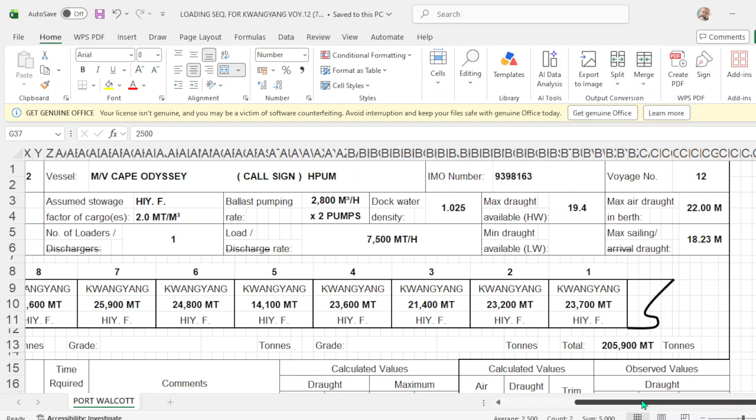This is an actual loading plan or loading sequence from the vessel Cape Odyssey. This is my recent vessel. This is a capesize vessel, and the actual loading of this vessel was on April 4, 2012 at Port Walcott, Australia, and the cargo is iron ore to be discharged in Kwangyang, South Korea. The total cargo to load is 205,900 metric tons, and the dock water at the loading port is seawater of 1.025.

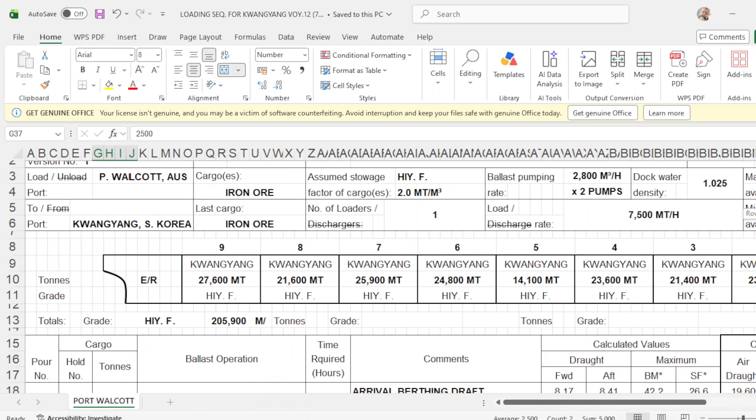So you have here the load rate, and we have the number of loaders, one loader, and this is now the sequence. As I previously explained, this is the pour, this is the cargo hold, and this is the amount of cargo to be loaded in each hold. This is the ballast operation, and this is the draft: arrival, berth draft. You have the forward, aft, bending moment, shearing force, the aft draft, the mid draft, and the trim. So the pour goes until number 20.

And the cargo hold starts with the odd numbers 3, 5, 7, 1, 9. Then you have 7, 3, 5. So these are the amounts of cargo to be loaded in each cargo hold, the ballast operation, and so forth.

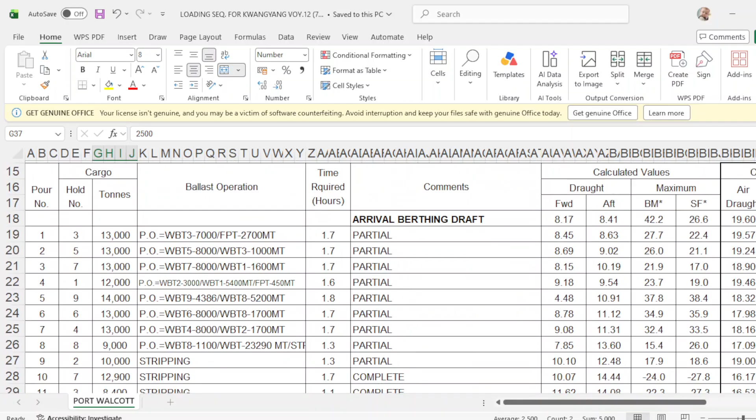Now, let's say for example that the loading operation is already in progress, and the chief officer has written in his night order book that upon reaching pour number 18 and upon completion of loading in hold number 4 of 10,600, the duty officer will advise the foreman that it's time to stop the operation, or the foreman will advise the duty officer that he will stop the operation, so that the chief officer and the draft surveyor will make a draft reading around the vessel, forward, aft and mid, port and starboard, to compute the remaining cargo to load for trimming.

But according to the plan, the trimming holds are hold 8 and 2, and the remaining cargo to load in hold number 8 is 2,500, and hold number 2 is 2,500, with a total of 5,000. Assuming that the chief officer and draft surveyor have completed the draft reading and they both agree on their readings, the reading forward is 17.77, and the reading aft is 17.96. The mid draft they both agree is 17.87, and the trim is 0.19.

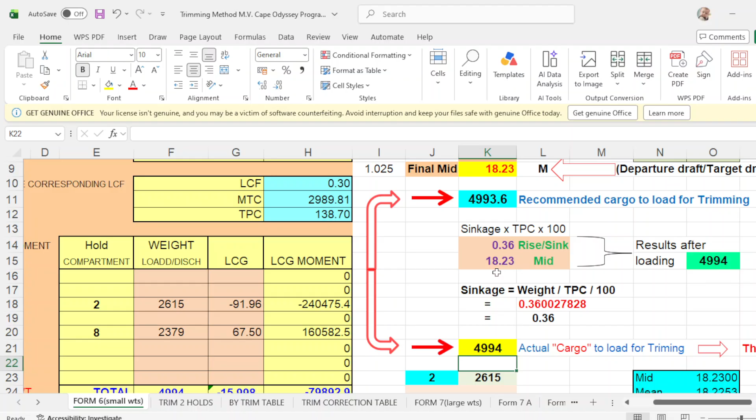So once you put 4994, the results after loading this amount, your departure draft will be 18.23, which is the same with your loading plan. And your sinkage is 36, which is the same here.

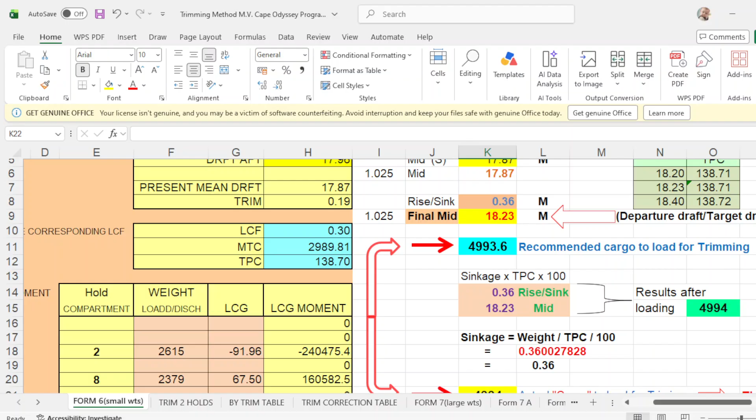And there's another formula of getting the sinkage: weight over TPC over 100. So your weight is 4994 divided with your TPC of 138.71, then divide by 100, you will get the sinkage of 0.36. So this is first sinkage, second sinkage, and the third sinkage will be this one.

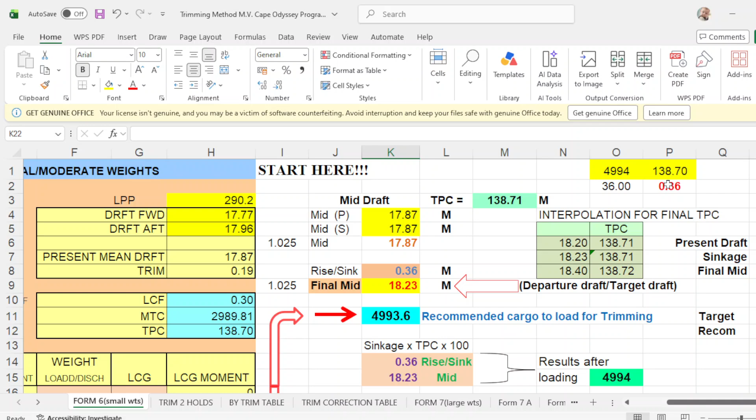Since you know already your weight of 4994, you put here 4994, and at the next column you put your initial TPC from your initial draft of 138.70, which is this one. So your weight of 4994 divided by 138.7, divided by 100, that will be 36. Okay, that will be your sinkage.

So your present draft is 17.87, your mid draft or your departure draft, plus your sinkage of 36, then your final mid departure will be 18.23. Okay, your target for trimming or amount of trimming is 4994, and the recommended is 4993.6, so difference of 0.4. Okay, so follow this arrow.

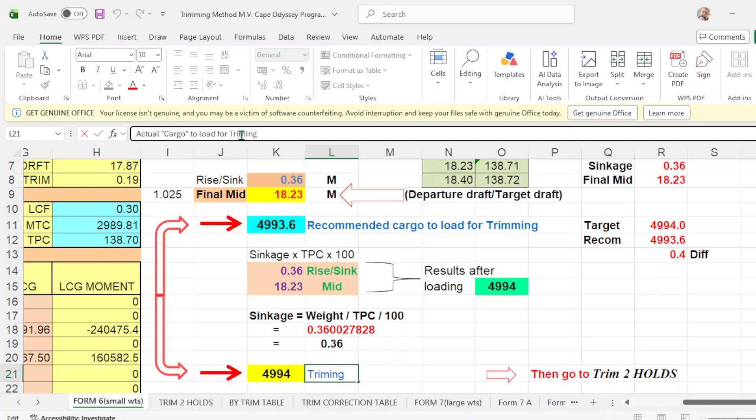Actual cargo to load for trimming, put this M, another M, I will save it. Then go to Trim 2 Holds. This is your trimming with 2 holds. Take note of the remaining cargo to load for trimming: 4994, the initial draft, mid draft, and your trim, the MTC, LCF, and TPC.

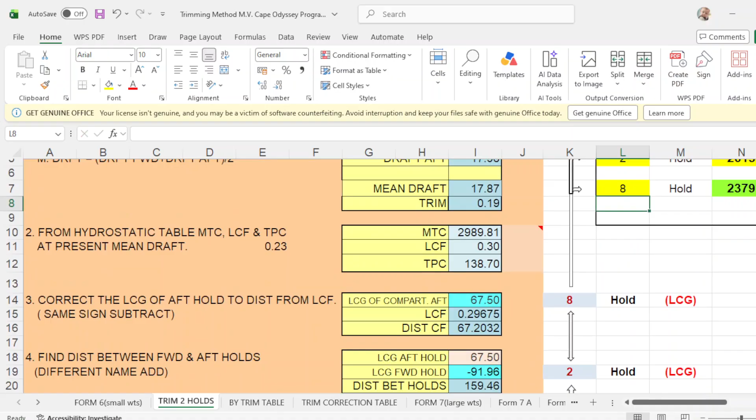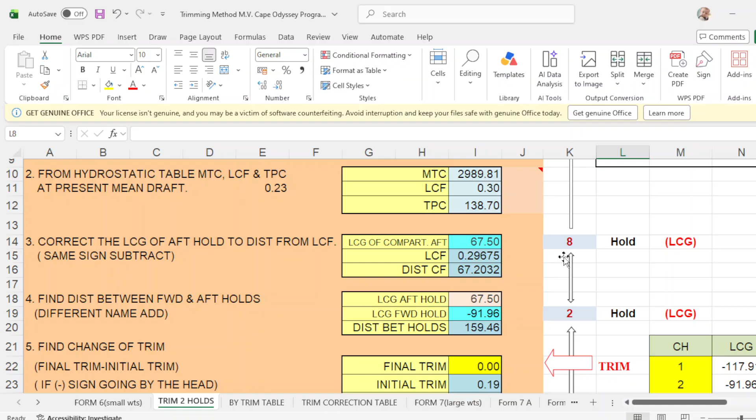Take note of your trimming hold. How much is your trimming hold? Trimming hold is 2 and 8. Go back to the program. So you put here 2, hold number 2, and number 8. Then scroll down. Take note, guys, when you press this number 2 and 8, it will automatically register this one, 2 and 8, and here 2 and 8.

For example, if your trimming hold is 1, put here 1, and the other one is 9, and they will change the trimming hold to 9 and 1, and the amount to be loaded is 9 and 1. So let's go back to the original, which is 2. Press 2, then press 8, and go back to hold 8 and hold 2.

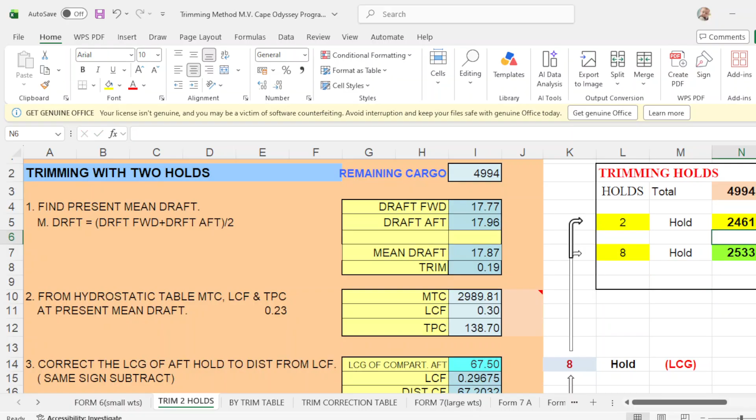Now we have no trim because according to our plan, it is even keel of 18.23 and 0 trim. So our trim would be 0. So you put 0. And it will recommend how much to load in hold number 2 and number 8. So in number 2, the program would recommend 2461. So we put here 2461. And number 8 will be 2533.

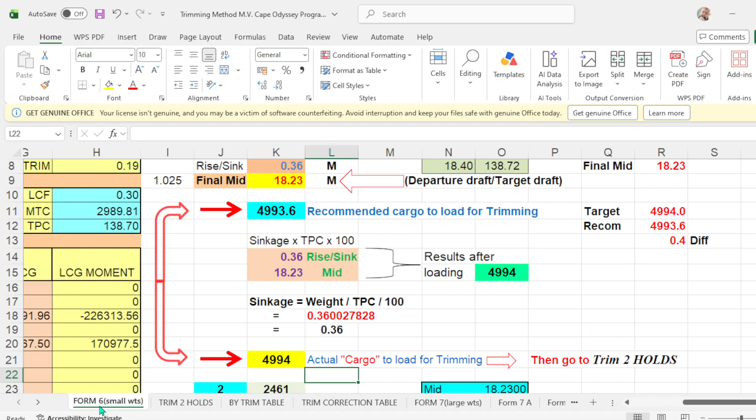Then you go back to form number 6. Take note of this amount of cargo to be loaded in 2 and 8: 2461 and 2533. So you go back to form 6, scroll down. Now, in hold number 2, you will load 2461, and number 8 was 2533. So you put here hold number 2 and 8, put the weight 2461 and 2533 number 8, and apply the LCG. Okay? Double check.

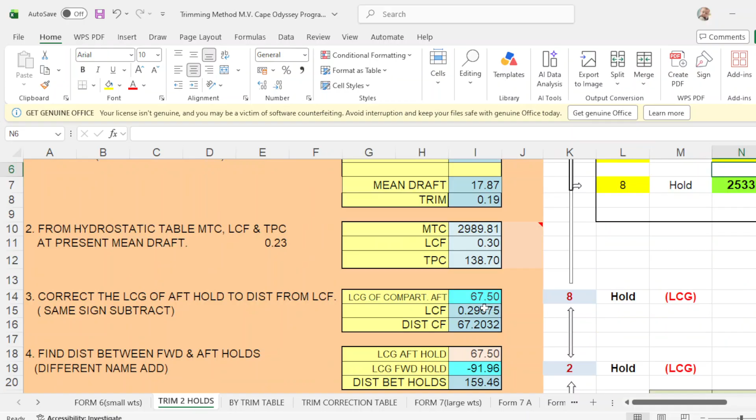LCG of number 2 is negative 9196. And number 8 is 6750. So confirm. Then scroll down. Your departure draft would be forward 18.23, aft draft is 18.23, zero trim, and your mean is 18.23, and your deflection is 0. So you have your program number 1, form number 6, and number 2, trim 2 holds.

Then we go by trim table. So trim table, take note of the amount of cargo to load, which will be 4994. Your trimming hold is 2 and 8, and the amount of cargo to be loaded. So in number 2 and 8, you apply the forward and aft correction. So in number 2, what is the forward correction? You go to trim correction table, then number 2. Select the draft nearest to your departure draft, which is 18 meters.

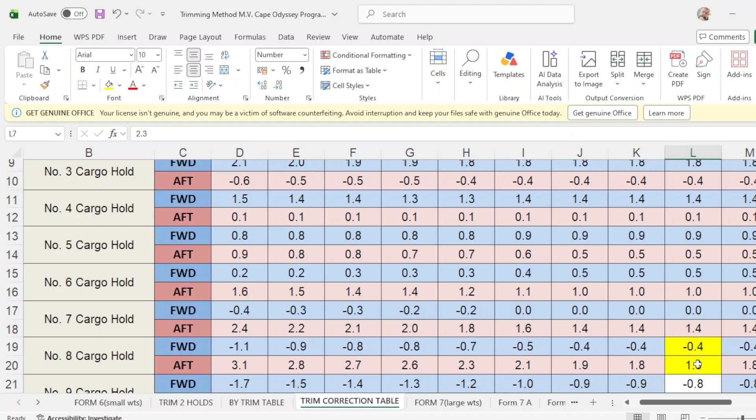So number 2 hold, forward correction is 2.3. So put here 2.3. And aft correction is how much? Negative 0.8. So you have here negative 0.8. And number 8 hold, forward correction is how much? Scroll down. Number 8, forward correction is negative 0.4. Enter. And aft correction is how much? 1.8. Okay, put here 1.8.

Then you will get your departure draft. Take note that you are trimmed by the head. You have less draft here, more draft forward. So we adjust the aft draft because you're trimmed by the head. So you adjust this one. Let's say 1.81.

You're trimmed by the head. Adjust again. Add another one. Put it to 182. You're still trimmed by the head. You make it 183. Now it's the same draft, but you're trimmed by the head. So adjust a little more. Make it 4.

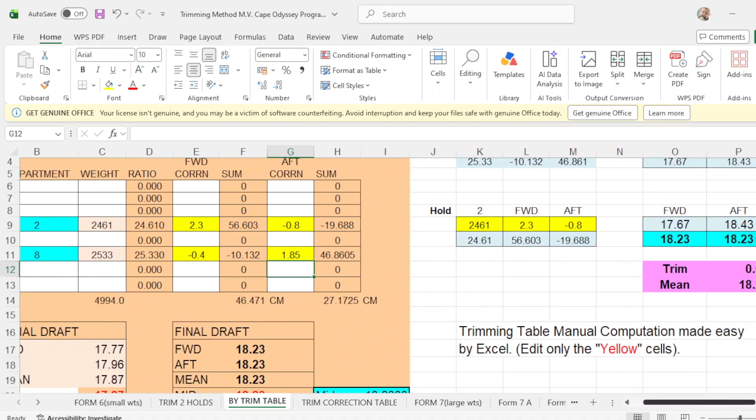Now take note, we are not sure which cargo to load first here. Because if you're going to load first in hold number 2, you will be trimmed by the head. So it's wise that you will load first in hold number 8, so that you will have a trim by the stern. So I have here adjusted the cargo, and first we will load in hold number 8, then hold number 2.

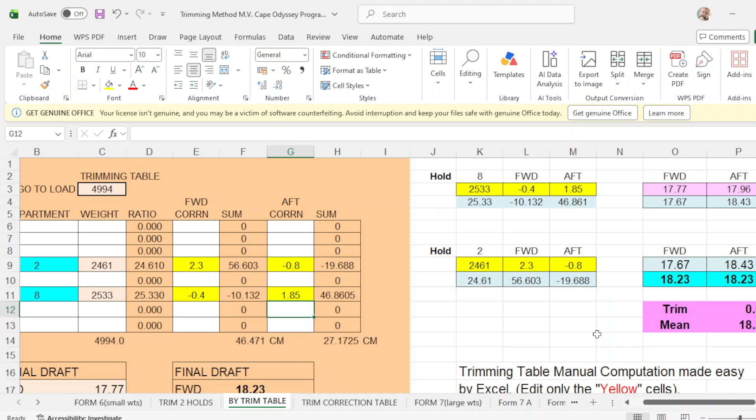So number 8 cargo to load is 2533, which is this one. The forward correction is negative 0.4, same. Aft correction is 185. Then hold number 2, the weight is 2461. The forward correction is 2.3, and aft correction is negative 0.8. Okay? So, this is your initial draft forward and aft.

Once you have completed loading hold number 8 of 2533, then your draft would be forward 1767 and aft draft is 1843. So then you will load in number 2 with the amount of 2461. Once completed loading 2461, then your final draft will be forward 18.23, aft draft 1823, trim 0, and mean draft 18.23, and your deflection is 0. Okay? So, take note, the deflection is the same.

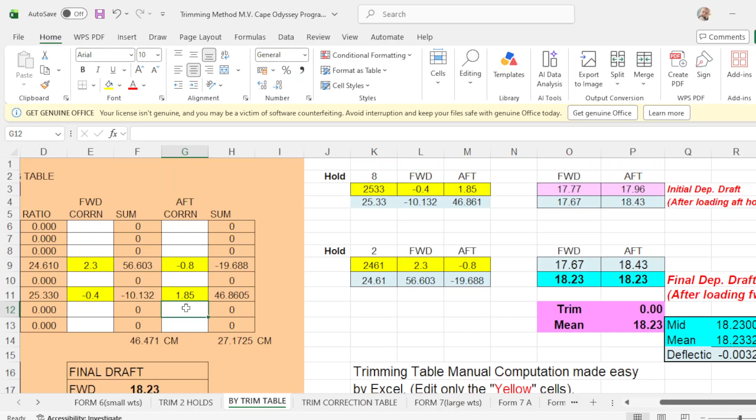So, we have now 3 programs. Form number 6, which is how to find trim when handling several moderate weights. Program number 2, trim 2 holds, which is trimming with 2 holds, and by trim table, trimming table. So we have 3 programs. And the last one, which is form number 7, says how to find draft and trim when handling weights involving large changes in mean draft.

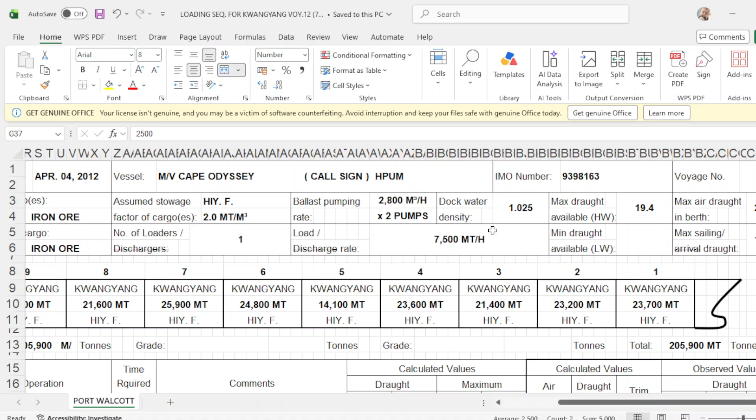Take note that the initial density at berth is 1.025. So our dock water density is 1.025 until completion. Okay? So put now the initial draft forward. Initial draft forward is 17.77. Put here 17.77, and our draft aft is 1796. So put here 17.96.

Okay, then you scroll down, put the weight of the cargo on each cargo hold. So we go to number 2. Number 2 is 2461. 2461. Okay. And number 8 is 2533. Okay. Put there 2533. Okay. Check the LCG of number 2.

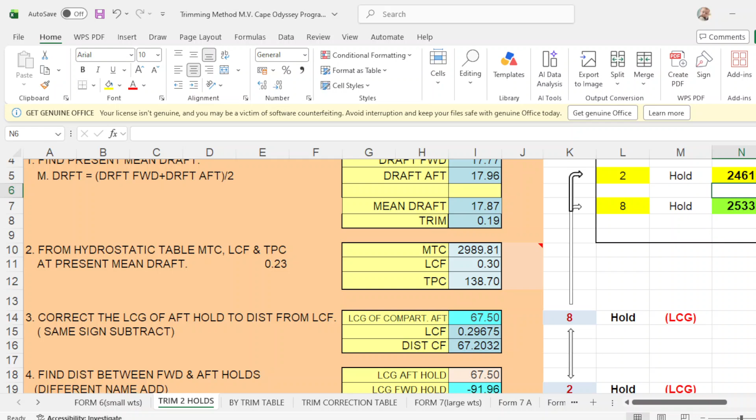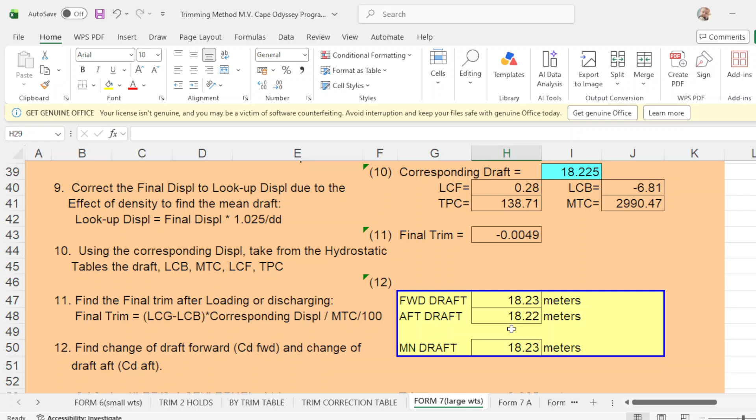LCG of number 2 and 8. LCG of number 2 is negative 9196. Negative 9196. And number 8 is 6750. So that is your LCG. So it's confirmed. Then your departure draft would be forward 1823, aft 1822, mean draft 1823, your trim is 0, and your deflection is 0.

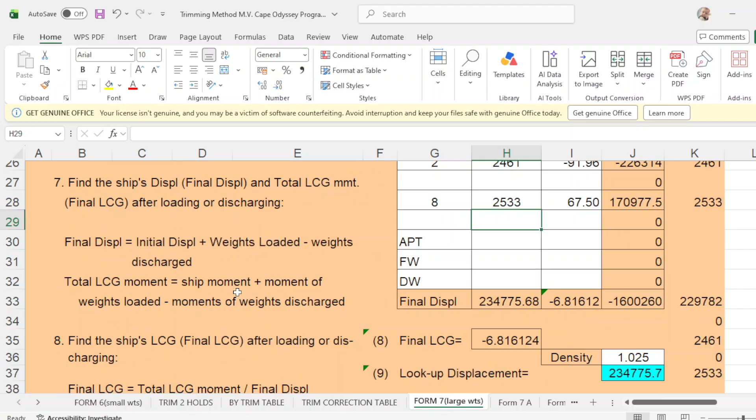Take note guys, in departure draft, it is important that your mean draft will be 1823. If you round it up, this should be 1823, and your mean draft here is 1823. So you have programs. This is form number 7, okay, which is how to find draft and trim when handling moderate weights involving large changes in mean draft.

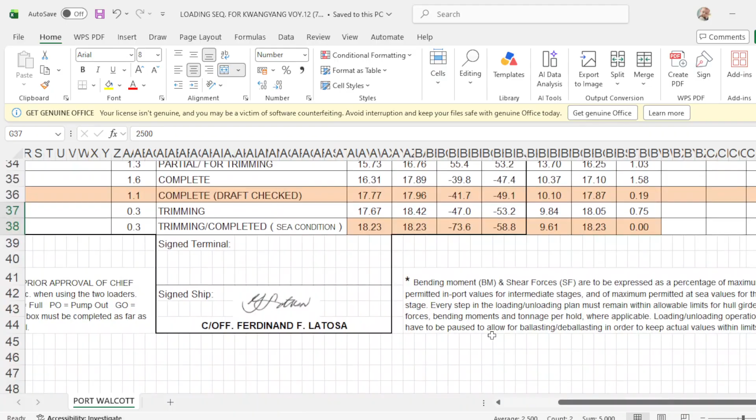Then you have your trim table, okay. You have your even keel here, trim 2 holds. You have even keel here, and form number 6, you have even keel, okay. So I'm sorry. So you have met the requirements for departure of even keel, forward and aft, or mean draft, and trim is 0. So this is your forward and aft, and your mean draft is 1823, and your trim, okay?

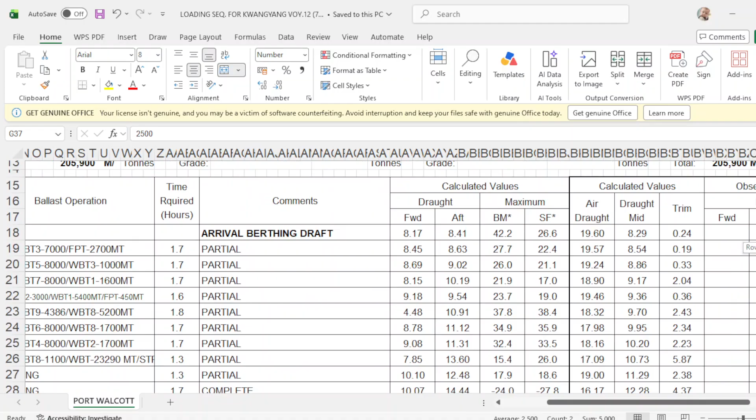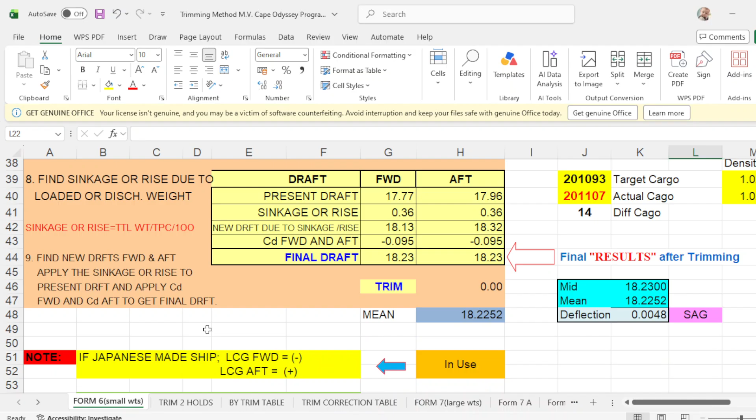So right on target. Now I will show, his recommended cargo to load is 5,000, 2,500. What happens if we put 2,500, 5,000, okay? Just to show you for example. You go to form 6, then 5,000 would be the same because only 6 tons difference, so it won't matter. So we are 6 tons less.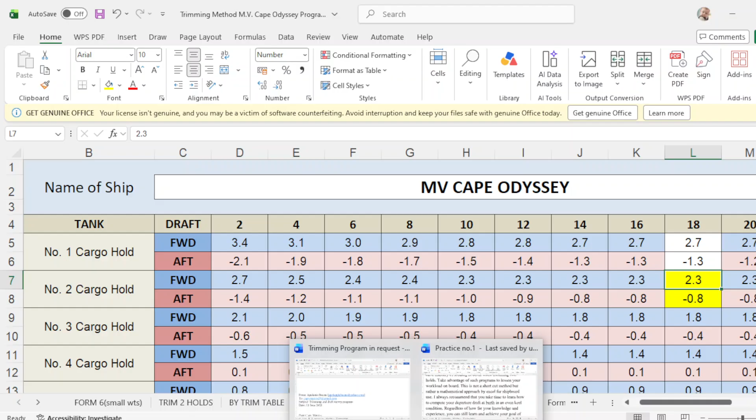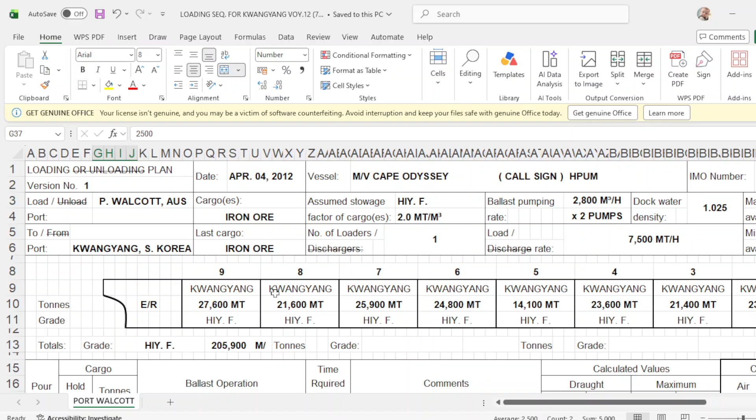Okay. Now this is only for Cape Odyssey, which is designed for this loading plan. Now, for example, another vessel, a Cape-size vessel, which is MV CPO Europe. This is also a Cape-size vessel, which was my previous vessel also. Now we will apply this loading plan. Let's say it is also loading in Port Walcott and to be discharged in Korea. So we'll just use this plan with a different vessel. Okay? So put it down.

So we go to number 6. So what is the draft? 1777 forward. Okay, 17.77. Aft draft is how much? 1796. So 17.96. Okay. Take note of the mean draft and the trim and TPC. Okay.

So make this 1787. Actual port mid 87, and starboard the same of 1787. I'm sorry. And our final departure draft is 18.23. Undo. Sorry.

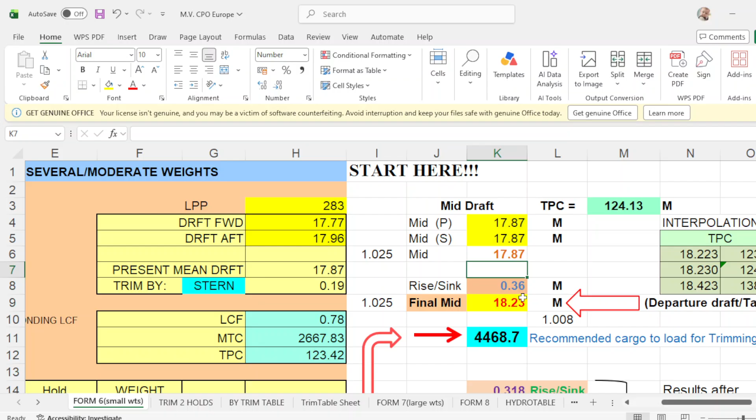This will be 1823. 23 was minus. So the sinkage will be 36, okay? Scroll down. Take note, this is now a different recommended cargo to load for trimming, which is 4469. So you put here, round it up, 4469. Okay?

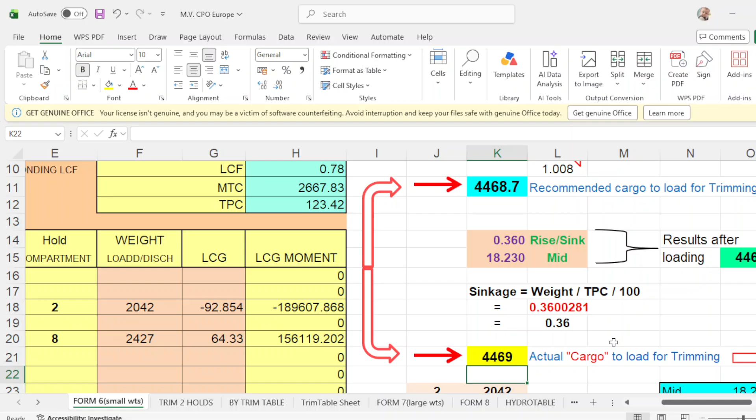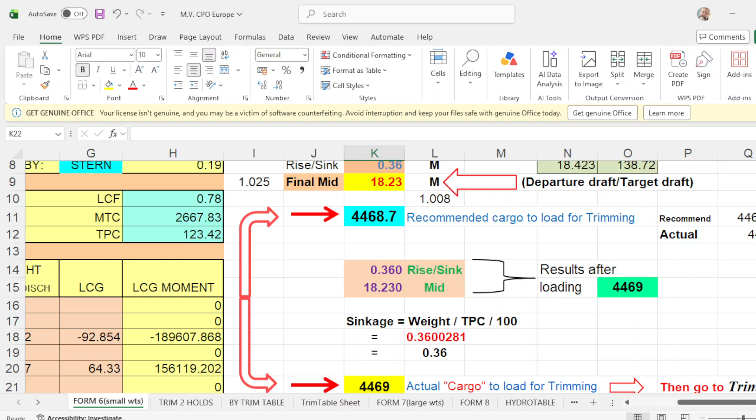So what happens if you load 4469? The departure draft, mean draft is 1823, which is the same with your departure here, and your sinkage is the same with this 036. And here's another formula of getting the sinkage, okay? Then, go up. Take note of the weight, 4469. 4469, you put it here. The TPC of the initial draft is 123.42, which is this one. 4469 divided by your TPC is 36, divided by 100.

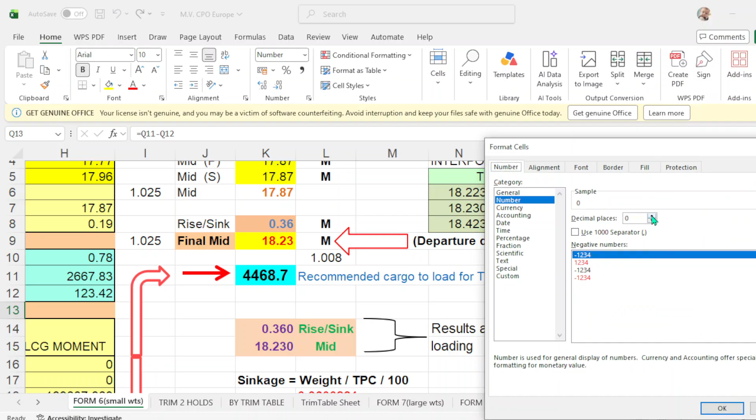So that will be 0.36, okay? So your present draft of 1787 plus your sinkage of 36, add this one, your final departure will be 1823, okay? The recommended is 4468 and the actual load to be loaded is 69, a difference of, put these two, so you will see, there you go. So difference of 0.3, okay?

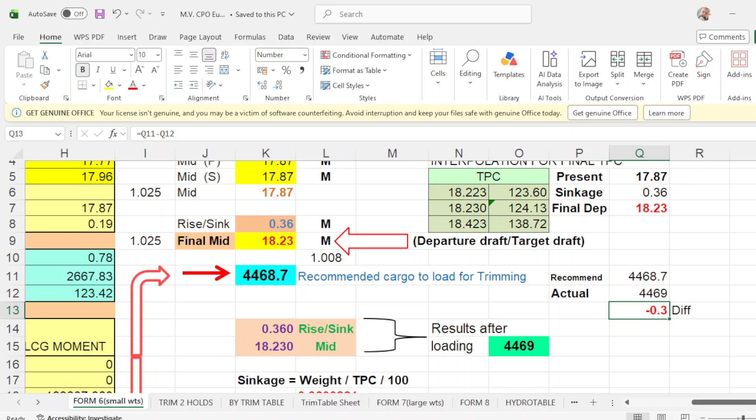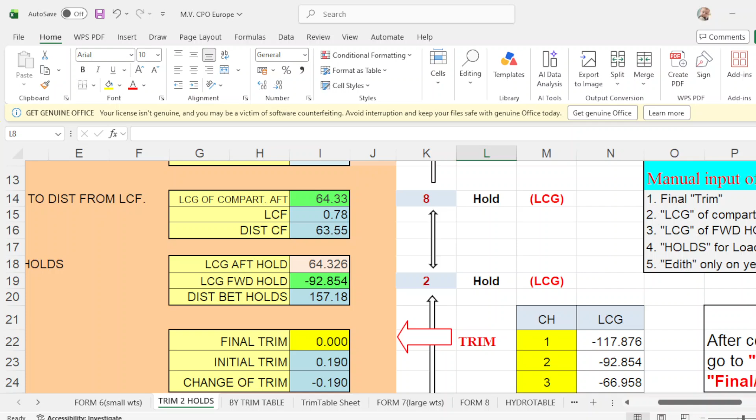Then this is cargo to load for trimming, then trim two holds. Take note of the weight, 4469. The trimming hold is how much? Trimming hold is 8 and 2. Okay. Put here 8 and 2. Okay, put here 2. I'm sorry, 2 and 8. Okay. Scroll down. You have no trim, 0 here.

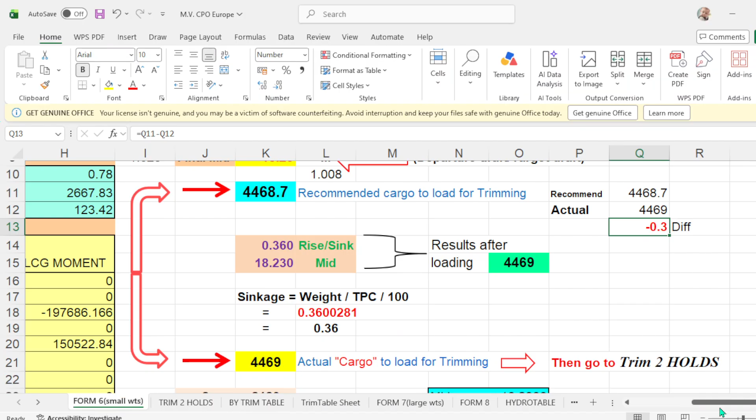And how much are you going to load in number 2? Number 2 is 2129. So put here 2129. And number 8 will be 2340, round it up, and your departure draft is even keel of 1823. Deflection is 0. Okay. Go back for number 6. Take note of your 2 and 8, 2129 and 2340, apply it here, and your departure draft would be even keel of 1823 forward, aft 1823, trim 0. Mean is 1823. If you round it up, then you have 0 deflection.

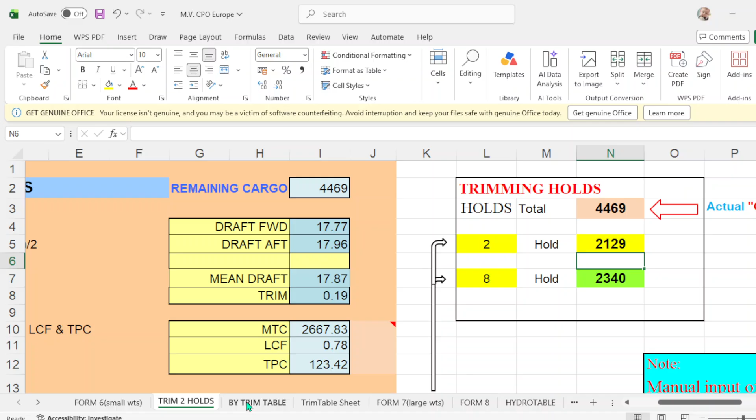So this is 1, 2, then we go to the trim table. Okay. Take note of the 4469, cargo to load. Apply the amount, the cargo hold, and your forward correction. So forward correction for this vessel, this is MV CPO. Hold number 2 forward correction is 2.3. And aft correction is how much? Negative 0.8.

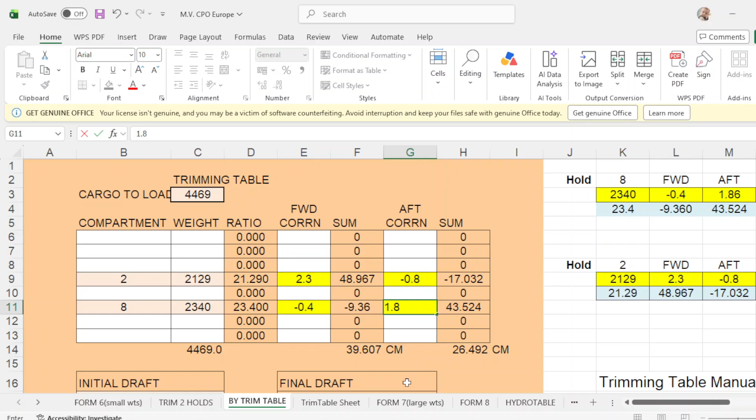Take note, guys, this is another vessel. And hold number 8. Scroll down. Hold number 8 forward correction is negative 0.4. And aft correction is how much? 1.8. Okay? Almost the same. Then let's see the departure draft. So, big difference. You are now trimmed by the stern. So we'll adjust this forward correction, hold number 2. We make that 2.4.

Take note, it's increasing. 18, 19. Make this 2.5. Add a little more. 2.6. Now, it's 18.23. So, we will adjust now the aft. You're now trimmed by the head. So, adjust the aft of hold number 8, aft correction. So, we add to this one. Let's say 1.81. Enter. No changes. You're trimmed by the head. So, adjust again. Make it 1.82.

Still, so you add again, 1.83. Nothing changes. Add again, 1.84. Two more. 1.85. Trim by the head. A little more. 1.86. Another more. 1.87. Sorry, 1.86. Make it 1.87. Now, even keel, okay? And zero trim here. Sorry, zero deflection, okay?

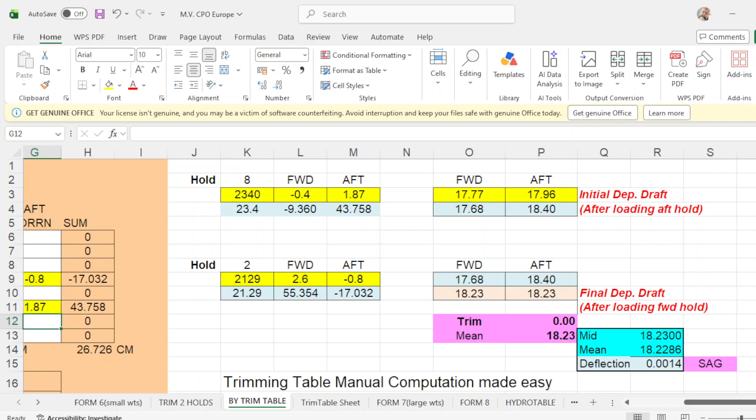Then in number 8, take note of the amount. Correction the same, and then what happens if you load number 8 first and number 2? Your departure draft here is even keel of 1823, mean is 1823, and deflection is 0. So the same. So we have 3 programs now. For number 6, trim 2 holds, even keel, and by trim table, you have even keel. Then the 4th one is for number 7, which is this one.

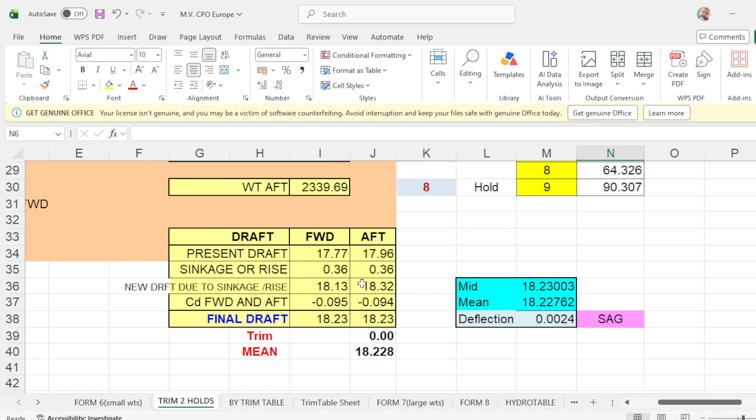So what is your draft forward? It's 17.77. And aft draft is 17.96. Okay. Then how much do you load in number 2? Number 2 is 2129. Okay. And number 8 is how much? 2340. Put here 2340. Take note of the LCG of number 2.

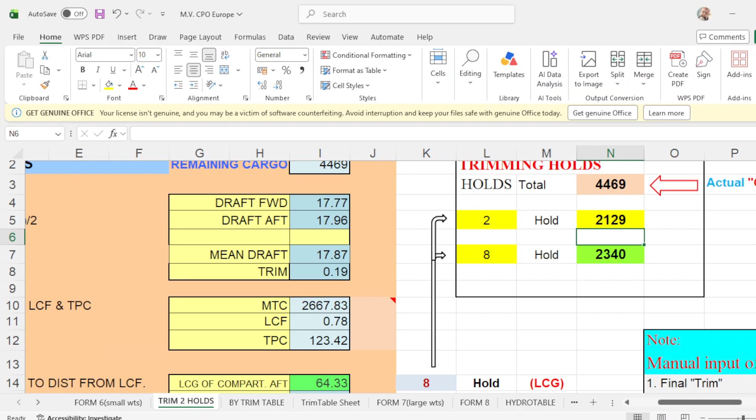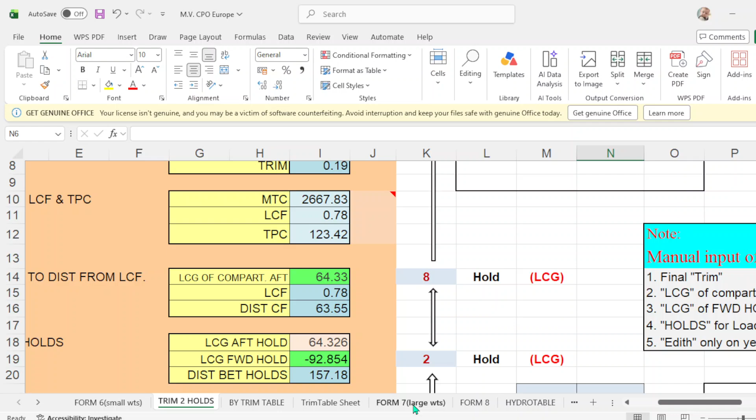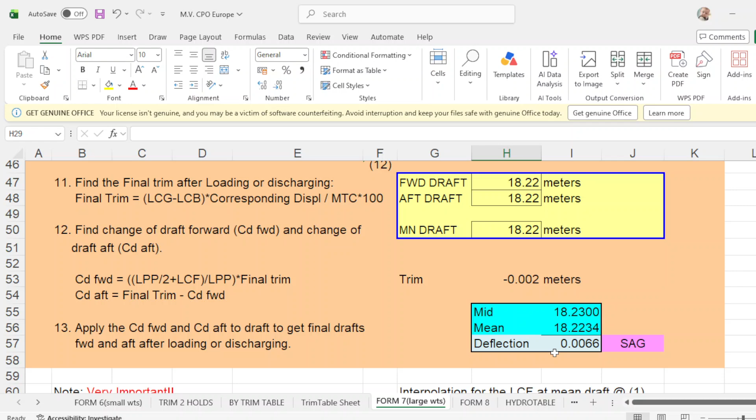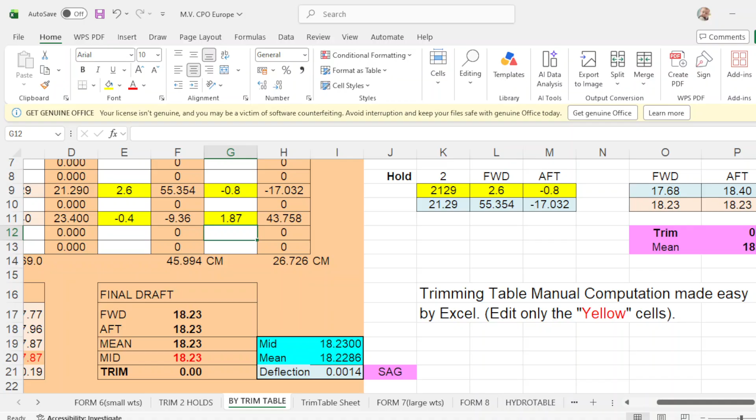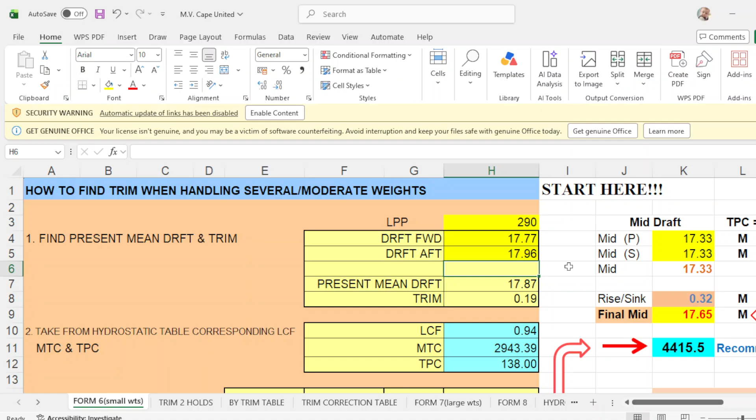Now, this was our second vessel. Now we go to the third vessel, which is the Cape United. So this is also a Cape-size vessel, Cape United. Then we go to form number 6. Again, how much is your draft forward? It's 17.77. Put here 17.77. And aft draft is 17.96. Put here 17.96. Okay. Then your mean draft should be 17.87.

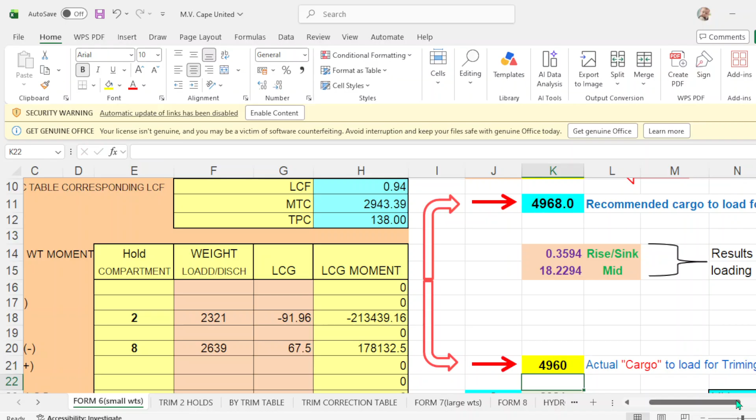17.87. And your final departure draft is 18.23. Okay. So this is the recommended cargo to load for trimming, which is 4968. So scroll down, then you put here 4968. Okay. Take note, the cargo is 4968.

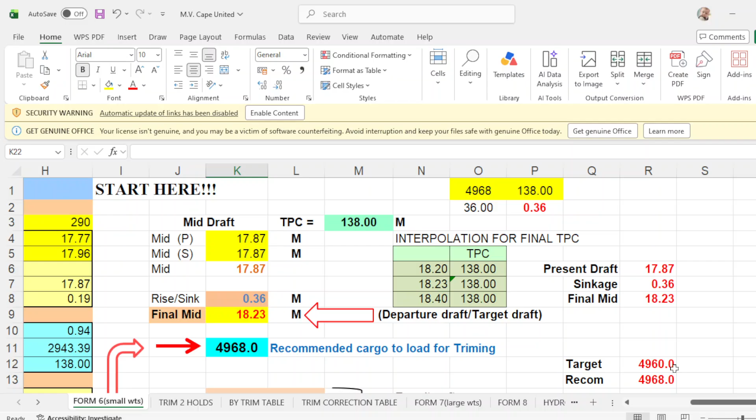Your initial TPC is 138. Divide this by TPC, divide by 100, will be 36 sinkage. So your present draft is 17.87, your sinkage is 36, your final mean is 18.23. Okay. Your target is 4960. I'm sorry, 4968. Then let's see, your target would be 4968. Your recommended is 4968. Then you have 0 difference.

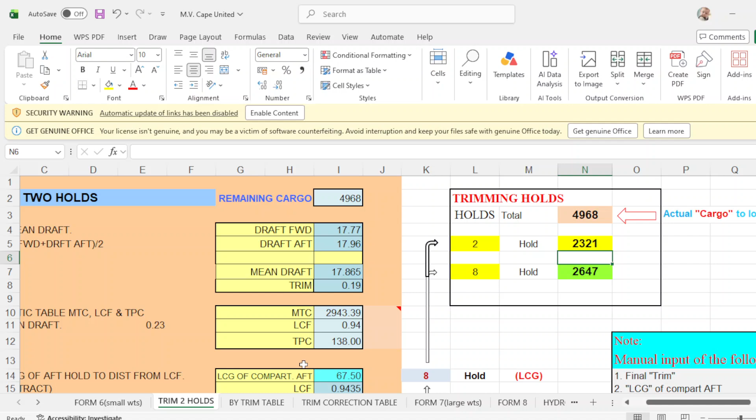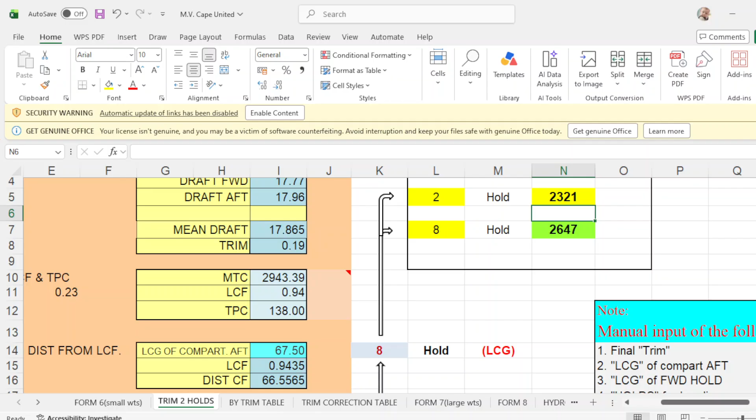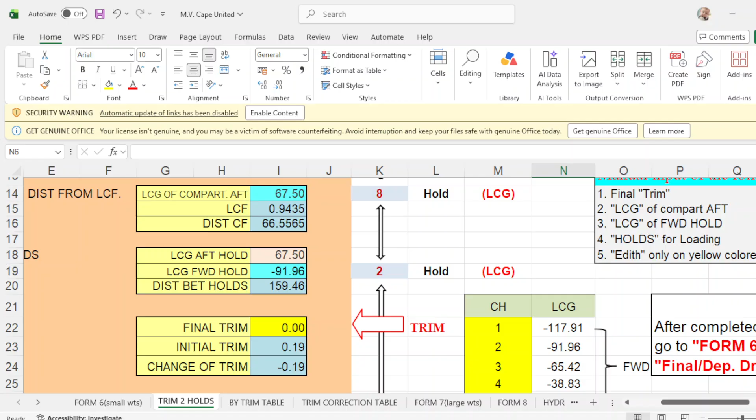Then you go to trim 2 holds. Make this a little bigger. Your initial draft here, your mean draft, trim, and your MTC, LCF, TPC. Then you go down. Your trim would be 0 because even keel. And how much you are going to load in hold number 2: number 2 is 2321. Right here, 2321, enter. Then number 8 is 2647. Run it up. And your departure draft is even keel. Forward is 18.23, aft draft is 18.23. Trim 0, mean draft is 18.23, and 0 deflection.

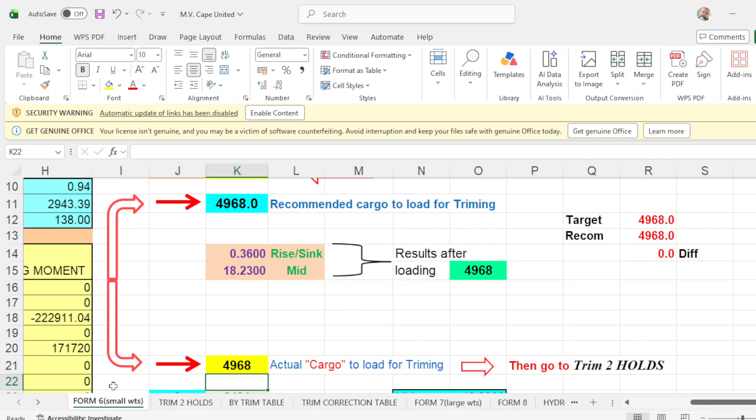So we go by trim table. This is the third program. Take note the trimming cargo to load is 4968, okay? And the cargo to load in number 2 is 2424, number 8 is 2544. What is the forward correction on hold number 2? Hold number 2, the forward correction is 2.3. And aft correction is negative 0.8. So, negative 0.8.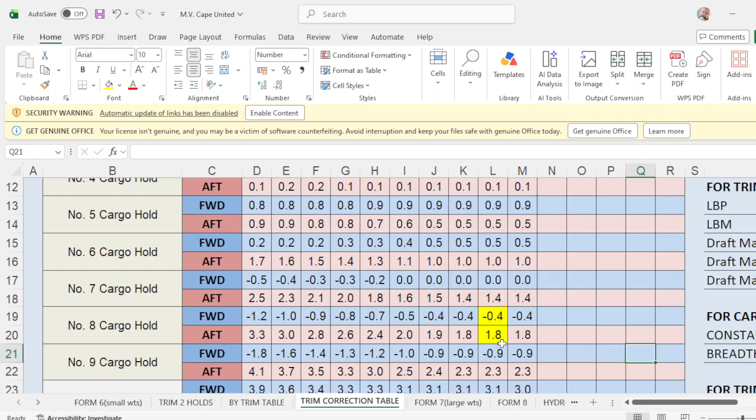And number 8, you go to hold number 8. Number 8 forward correction is negative 0.4. And aft correction is 1.8. So put here 1.8. Scroll down. Take note your aft draft is less, so you add to your aft draft. Adjust the aft correction. You put add 181. Then you're now even keel. Take note your deflection is 0.038. Okay. Deflection.

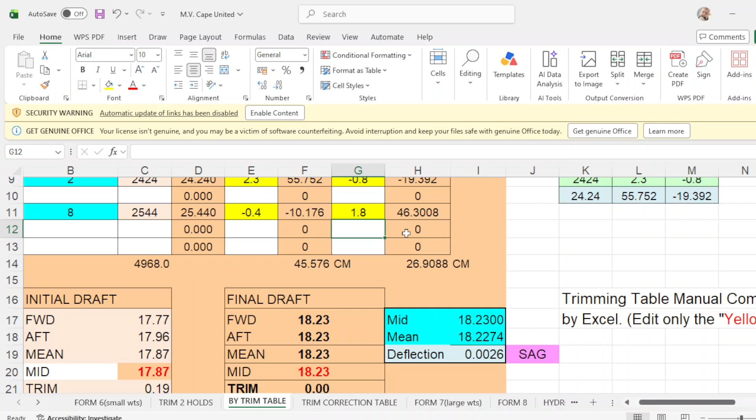Then we go to trim 2 holds. Make this yellow. Okay. Then here even keel and mean draft deflection is 0. Then our last program, form 7. Your density is 1.025. Forward 17.77. Aft draft is 17.96.

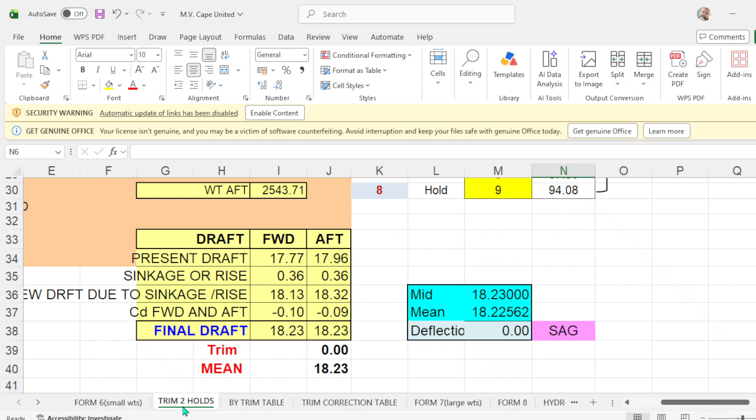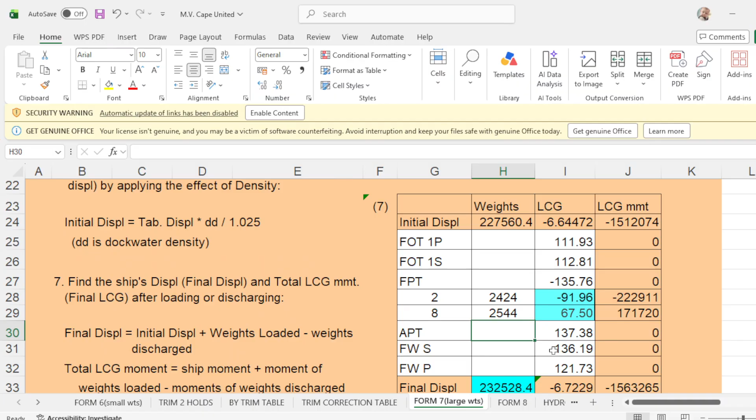Then put your weight here. Number 2 is 2424. And number 8 is how much? 2544. Put here 2544. Check the LCG. LCG of number 2 is 91.96. Number 8 is 67.50. Okay. And your departure draft is even keel. And your mean is 18.23, 0 trim and 0 deflection.

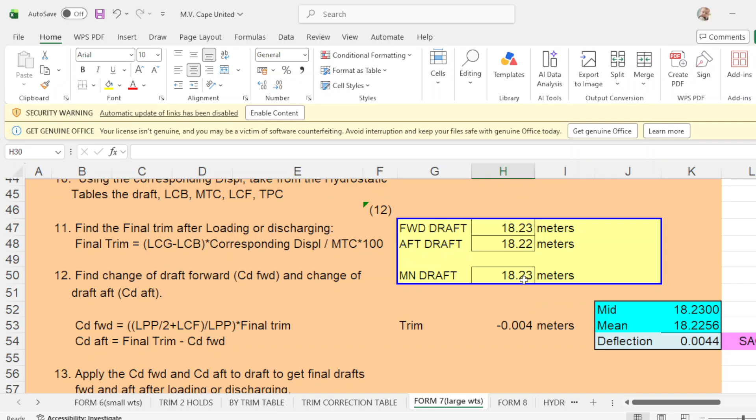What is important, guys, here is your mean draft of 18.23. That's all that matters. Regardless of your draft forward and aft, what matters more is 18.23. Now, again, I want to emphasize, take note of this initial displacement. Take note of this formula, guys. This is very important. I will highlight this one. This is your initial displacement.

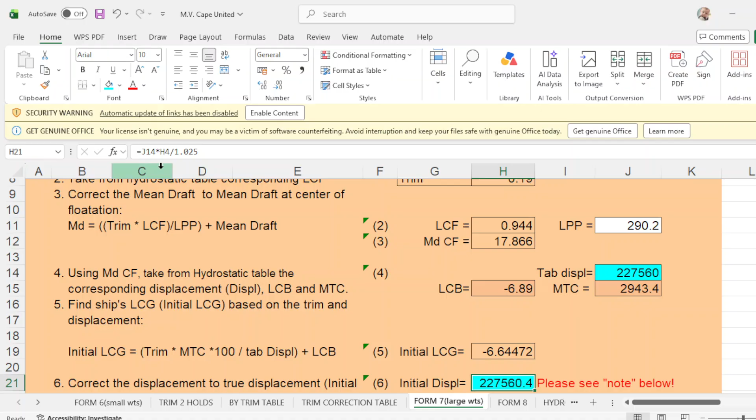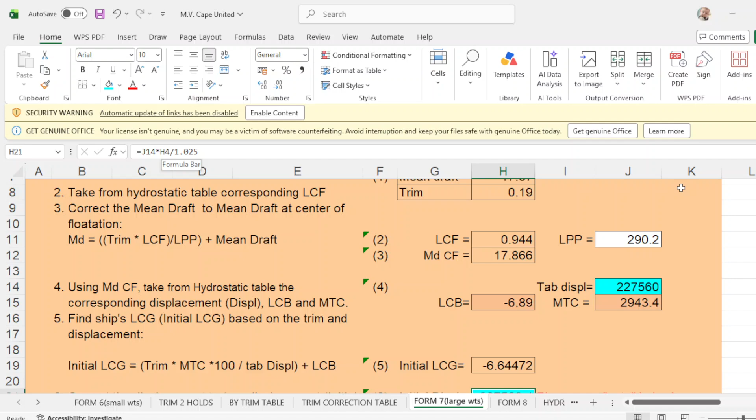Take note of the formula. J14, I'm sorry, J14 is displacement, times H4, your density here, over the constant of 1.025. This is how you get your initial displacement. Again, the formula says J14, which is your tabulated displacement, times your density H4, over 1.025. This 1.025 is constant, guys.

And another one, this displacement. This is the reverse formula. This is H3: your total or final displacement multiplied by 1.025 over J36, which is your density. Because sometimes your density will change. This could be 1.023 or 1.024. That's why J36 changes, but this one is constant at 1.025. So you put it back to 1.025, then it goes to this draft.

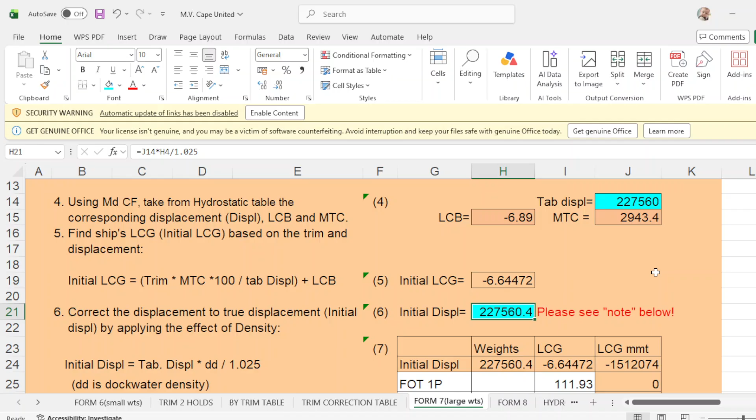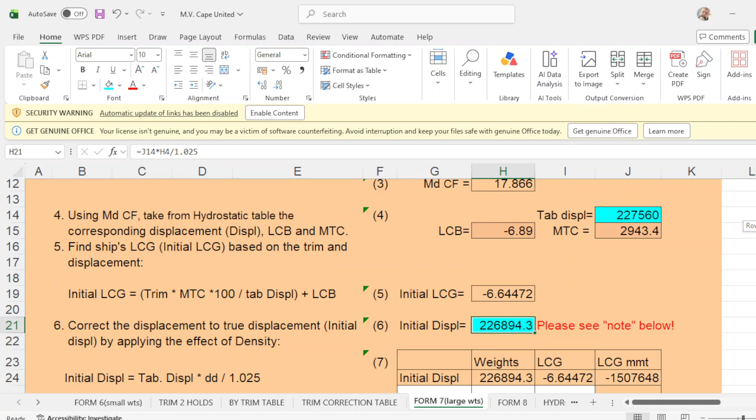And the initial, take note of H4, the density. You can also change this one. 1.025 is constant. If you make this H4 1.022, then the initial displacement will change. If you put it back to 1.025, undo. Then you still have this draft.

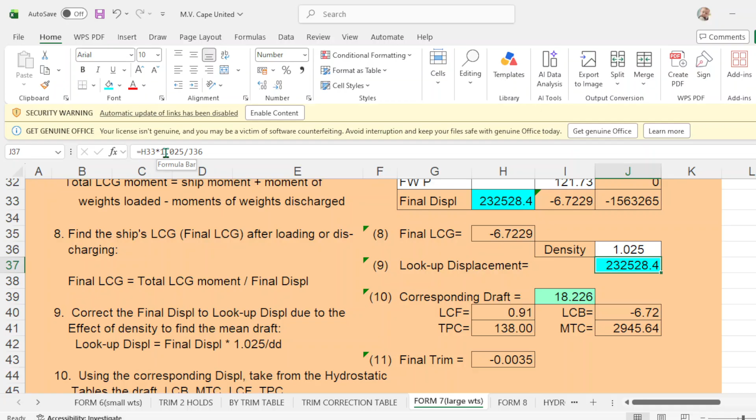I just want to emphasize this displacement formula. You see, it's the reverse. Instead of this one, we go at the end, like this one. But on the other side, this 1.025 is in the middle: final displacement times 1.025 over J36, which is this one.

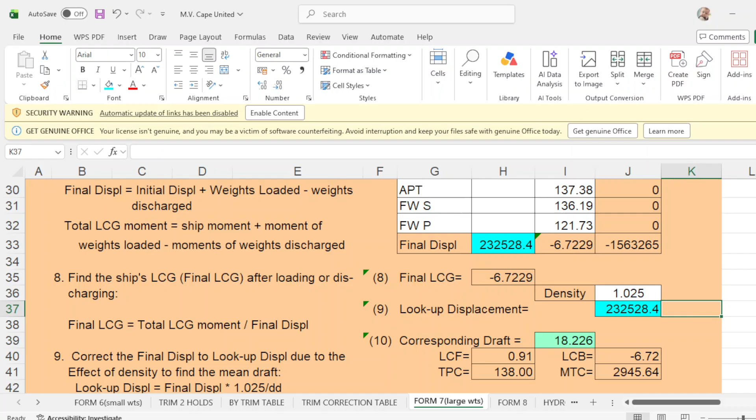So that's it, guys. I'm just using 3 capesize vessels for practice. So the more loading plans or loading sequences you have, the better. You can practice this on board, at home, at your office, or wherever you are. With this loading plan and this program, it will be much easier for you to practice until you have self-confidence doing so.